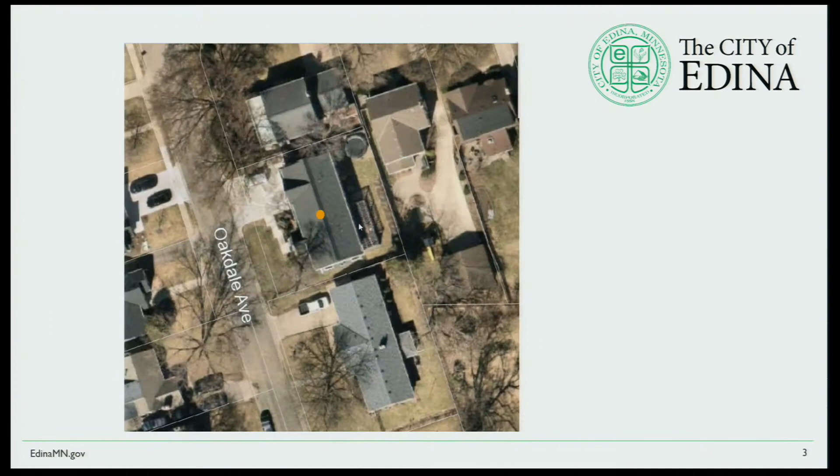Because of the depth of the lot, and given the minimum lot width in the R1 district is 75 feet, this lot is 80 feet in width by 120 feet in depth—wait, this lot is 80 feet in depth, so it's 40 feet short of the minimum depth requirement. When this house was originally built and designed, it fits pretty much as a rectangle, exactly within the required setbacks. The front yard setback is roughly 26 and a half to 27 feet, the minimum based on neighboring properties along Oakdale that front Oakdale. The side yard setbacks are 10 feet.

The house is built up to the 10-foot setbacks, and then the rear yard setback is 25 feet. So the back wall of the house does go right up against that 25-foot rear yard setback. Decks can be 5 feet from the side and rear lot lines, so the deck does meet the setback requirements.

The existing house itself is within the maximum allowable lot coverage requirements. However, with the deck area, there's quite a bit of deck area that pushes them up beyond the allowable 30% limit. They're at 31.5%, so they are over on the existing building coverage. They are under currently the 50% maximum impervious surface ordinance requirement.

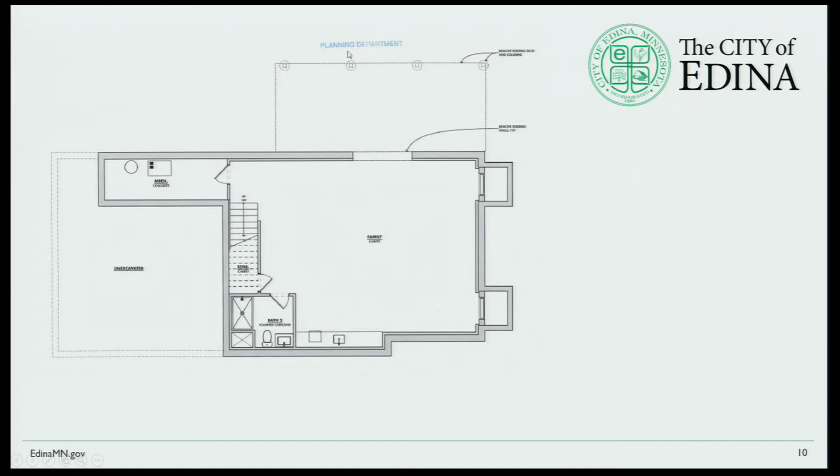So this is the existing basement area. With that deck, you can see the posts above on the main, and then what that will be replaced with is a bedroom or exercise room that will have an egress window on the south side. It's smaller than the deck.

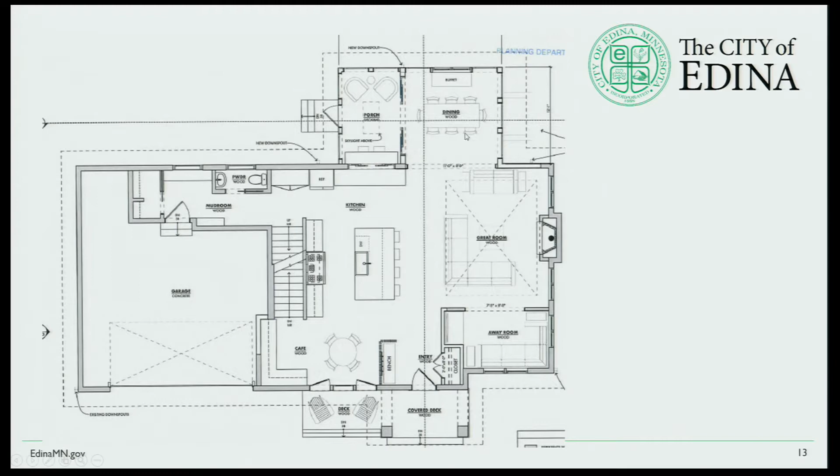And then this is the existing main floor with the deck, larger, and that addition that will replace it. And then on the second floor, it's going to have a flat roof. So that's what the visual will be from the rear yard, and then from the south. And then some perspectives of what's existing there currently and what they're proposing.

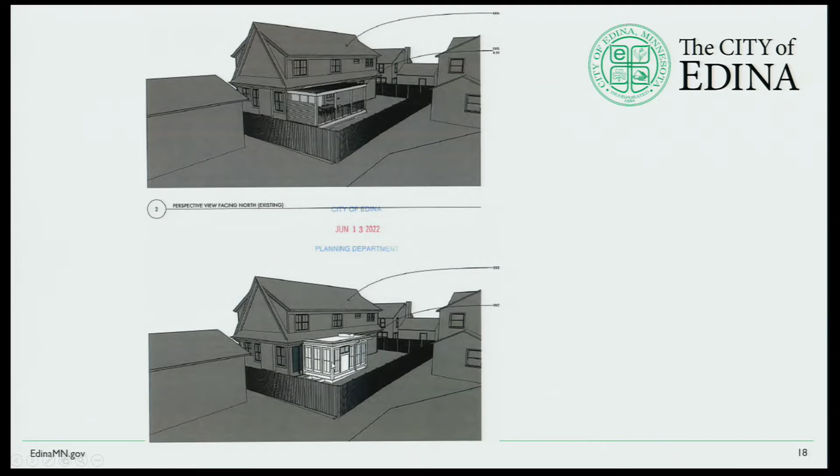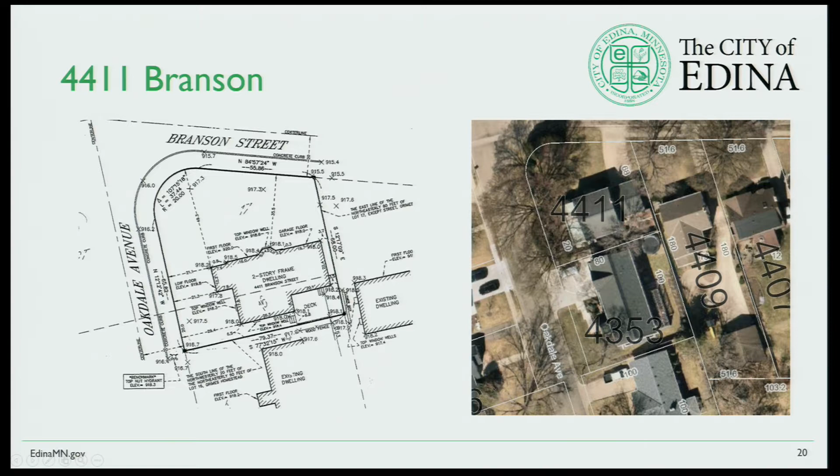This one, unfortunately, is on a corner lot, so they have deeper setbacks along the corner. Their rear yard setback is at 6.5 feet, side yard setback's at 3.5 feet, and their deck is probably within inches of the rear yard. And then the house directly to the south has, I believe it might be a porch at 4361 Oakdale that has a 13-foot rear yard setback.

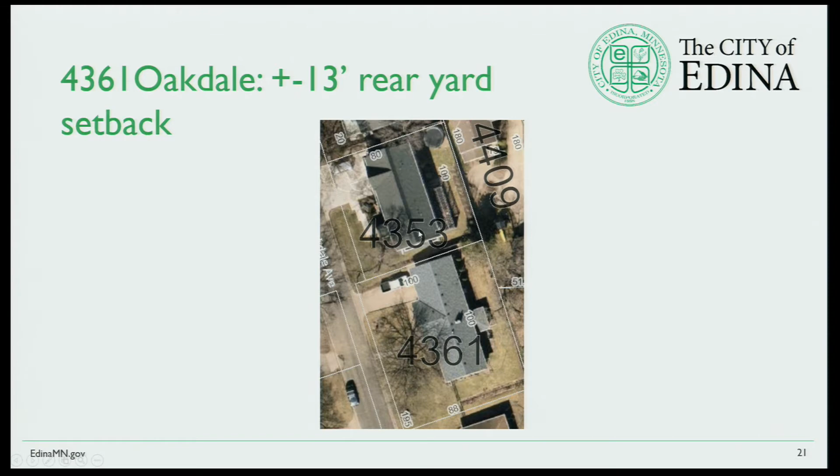So in terms of the adjacent homes that are along Oakdale, the setback that's being proposed or that they will be maintaining is not dissimilar to what is occurring. So rear yard setback variances are not ones that we typically see because there's usually the most opportunity to add onto your house behind your house in the rear yard. The only instances it seems like we run into an issue with that is when you have these shallow lots.

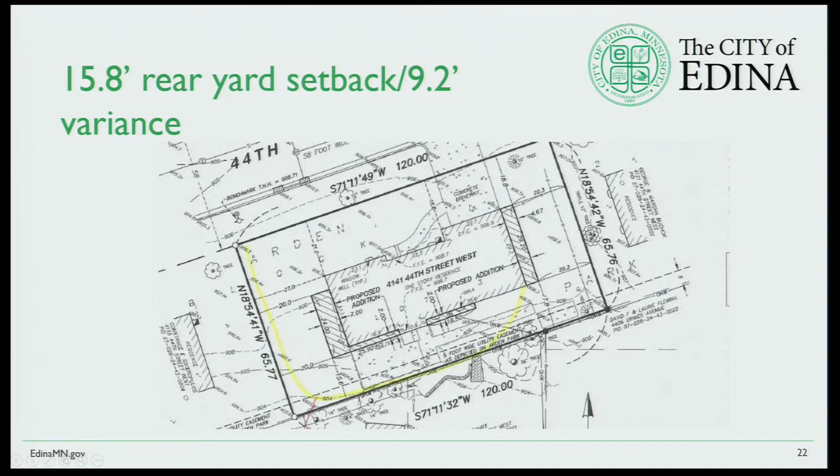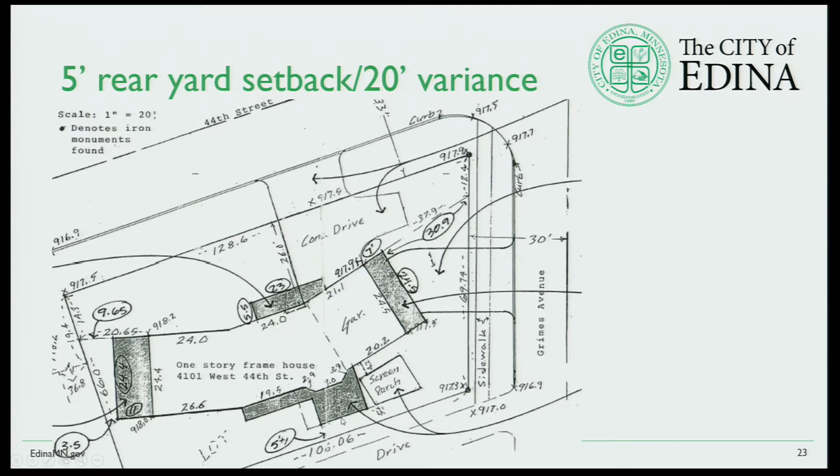Here's an example of one that received a variance for a 15.8-foot rear yard with a setback variance of 9.2 feet. You can see it's a very shallow lot. It's wide, but very shallow. And another similar situation where it was actually ended up being a 5-foot setback, so there was a 20-foot variance approved for that particular property.

So the primary issue is: is it a reasonable use? The proposed use is permitted in the R1 single dwelling unit district. It complies with the zoning standards with the exception of that east rear yard setback requirement. The addition will replace the deck that will improve on the building coverage. Currently, without the deck, the house is lower than the maximum amount of coverage, but they are constrained on all sides. There's no opportunity to add on to the house without the benefit of a variance.

The shallow lot depth and limited design opportunities was not a self-created situation by the applicant. This house, as my understanding, was not built specifically for them. But again, there's no opportunity without the benefit of a variance to modify.

The proposed addition conforms to all other zoning standards, and granting the variance will not necessarily alter the essential character of the neighborhood. All other aspects of the home conform to the ordinance requirements. The adjacent homes have some similar challenges along Oakdale with those very square, shallow lots. And the addition is not visible from the street, so the streetscape isn't going to change. So staff does support the request and does recommend approval.

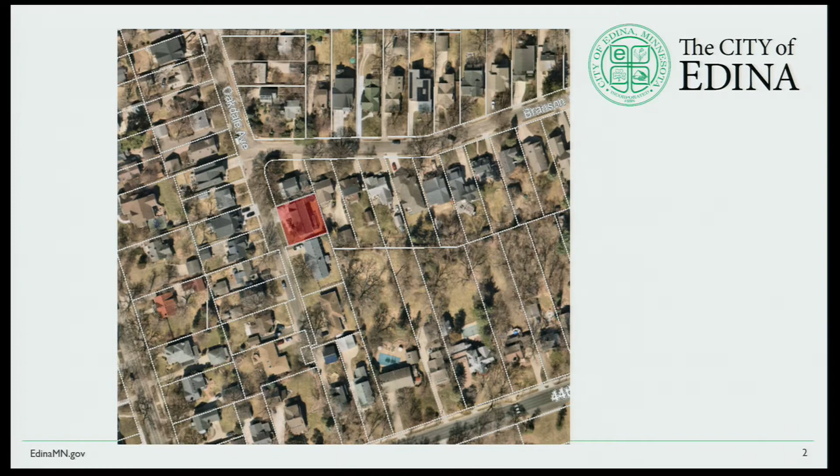If we do not approve this today, would that deck that's currently existing just stay there? Do you have any plans of removing it, or is it just going to remain as a structure? It would remain.

Okay, thank you. Any other questions for either city staff or the architect?

All right, then I think we should go to our public hearing. So we will now hear from residents who would like to provide testimony.

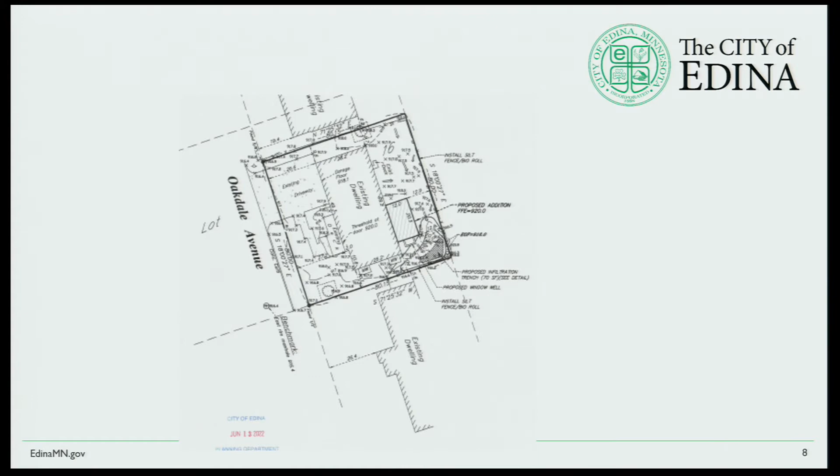Thank you. Any other questions? Commissioner Bennett? Just a clarification maybe for Ross, who's on the line too. As far as I understand it, we do treat decks and patios as impervious, even though water might seep through it. I mean, depending on the design, you often don't want to allow some permeability below your deck. And a lot of times there's things in place to shed water quicker underneath it for that reason. So maybe Ross could just comment on that too, if that is correct, that we objectively look at a deck as an impervious surface.

Just from an engineering standpoint, Commissioner Bennett, for the city. Yeah, I think I'd want to phone a friend and see if Chris knows the language better than I do, but I think you're correct that decks are considered impervious. I know patios are. That is correct. So I guess just to go along with that comment, yes, water can get through, but if they're designed well, they're almost like a roof that leaks a little bit. So, I mean, yes, there's a marginal change, but there really isn't that much of a change in hardcover when it comes to what's being proposed and what exists today. Even though it feels a lot different, it just isn't.

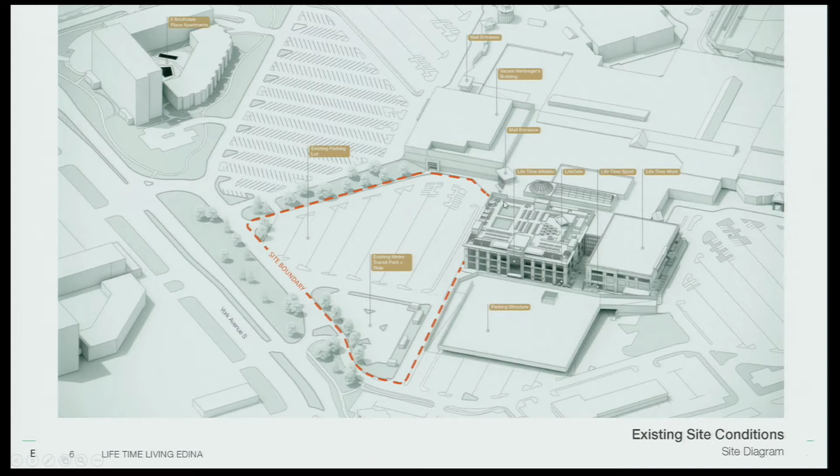Before you is a sketch plan proposal located at Southdale for Life Time Living. Within the Southdale site, the project would be located in the existing parking field north of the Southdale Place Apartments, and just east of the recently built Lifetime Fitness facility. The site is guided in our comprehensive plan for community activity center use, and is highlighted as one of the areas more conducive to dense development, particularly between France and York.

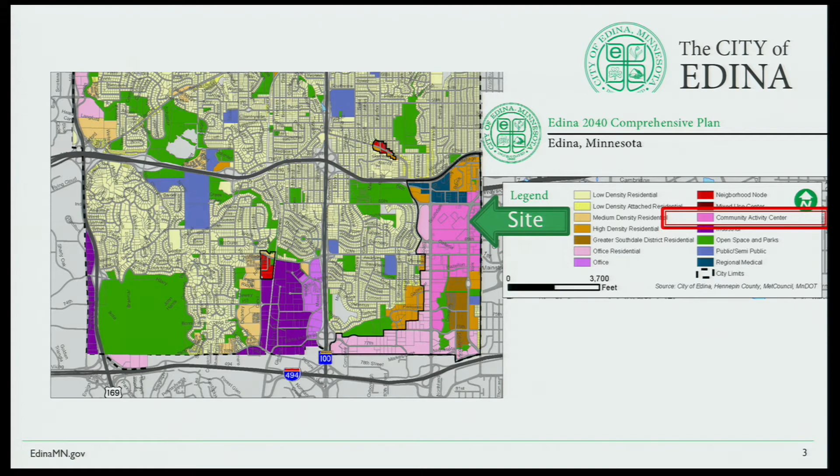The density allowed on this site would be up to 150 units an acre. The site is currently zoned planned commercial district, which allows office uses, retail uses, and apartments as a conditionally permitted use. The applicant is proposing to construct a 300-unit, 32-story, 400-foot tall luxury apartment building, located on a 3-story podium, connected by a skyway into the existing Lifetime Fitness.

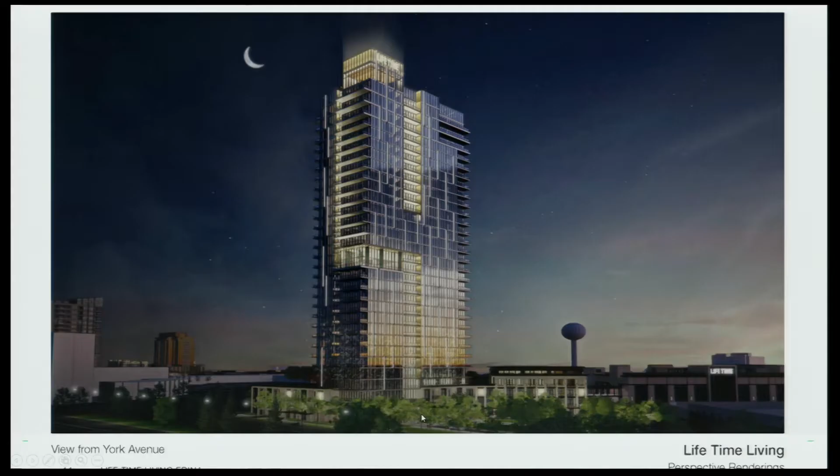Here is a rendering of what the project would look like at night. Again, you can see the podium, and the applicant will go through in more detail the specifics of the building and the site plan, so I'll just give you the high points here and what's required by code.

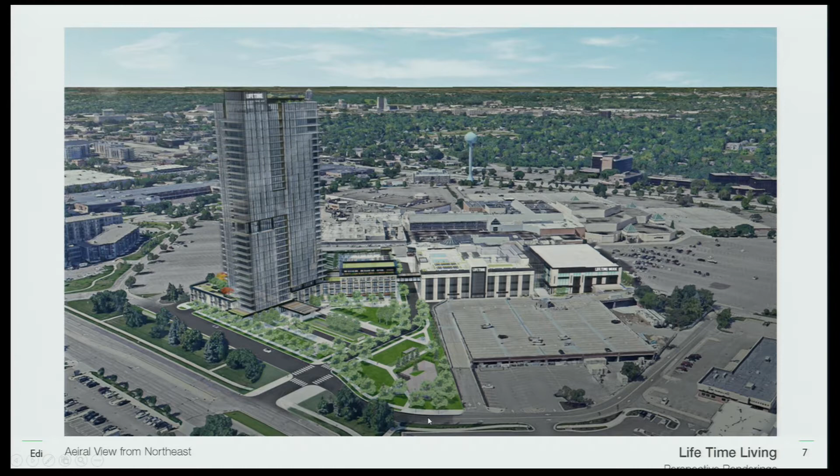Here's an aerial shot of the site. The proposal would include some significant green space addition. On the site that exists today is the Metro Transit station located here. This project would require that to be relocated on the site, so there's pedestrian connections and green space that would all be open to the public, with public easements established over that green space.

So what this request requires, should a formal application be made, is a site plan approval, a building height variance - currently the zoning ordinance requires a maximum of 12 stories and 144 feet - a building setback variance to R1 property, which I'll show a graphic demonstrating in a minute, and a parking stall variance. The residential development would be code compliant, but in terms of Southdale itself, they're taking away parking spaces, so they would need a variance for the overall Southdale development.

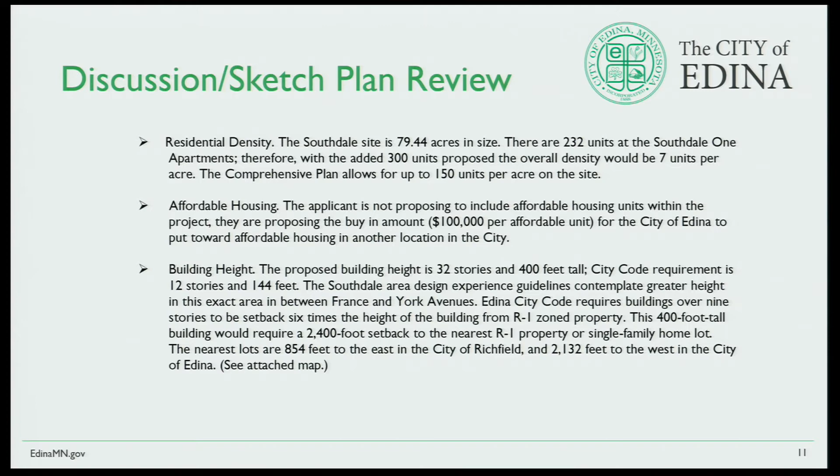In regard to the setback that I mentioned to R1 properties, for any building that's over 9 stories tall, the required setback to R1 property needs to be 6 times the height of the building. So the building itself needs a 2,400-foot setback to the nearest R1 property.

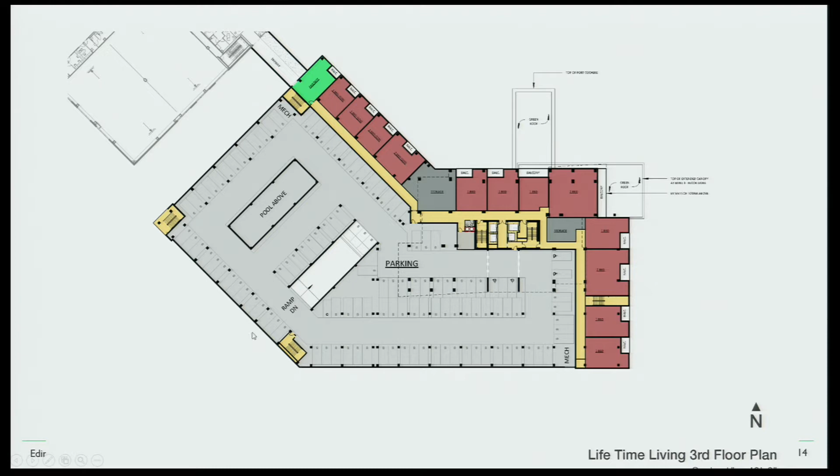But this was a concern raised in Mick Johnson's memo provided to the Planning Commission: the street typologies of the internal ring road that comes around through here, or at least the existing drive access. So this would be the parking ramp exposed on those sides, of course screened.

This demonstrates the tower, the location. As you can see, it is set on a podium that does step in from York and from the south. Part of Mick's review, he did talk about the 200 by 200 foot blocks that we're trying to achieve in the Southdale district.

He had suggested that the site be broken up into 3 smaller blocks with 3 apartments, essentially 3 buildings on the site. Again, the design experience guidelines are recommendations.

It's not code. It's just intended to get this discussion going as part of the sketch plan. The pedestrian connections - compared to previous projects at Southdale, where we've been developing the corners with Southdale 1, the RH on this corner, the Shake Shack on the corner, and the apartments, we've been really trying to get better pedestrian connections from the mall itself outward.

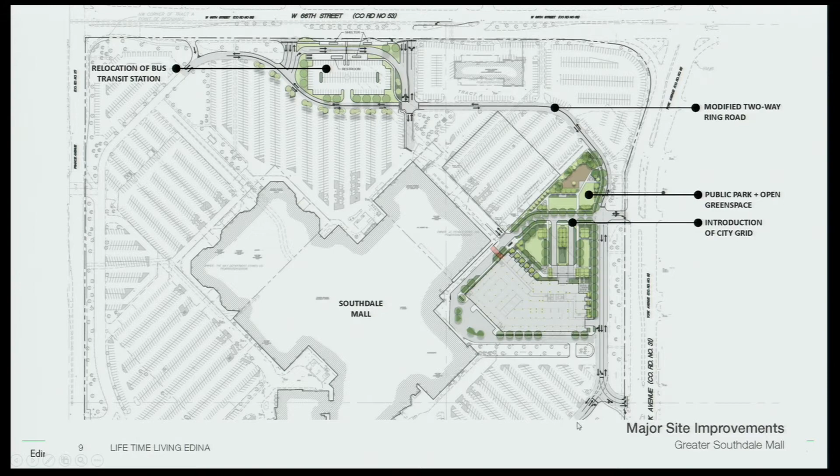This project really does that much better than those previous projects. As you can see, all of the green space that's added with those pedestrian connections out to the perimeter sidewalk of Southdale - there's quite a vast improvement there.

In terms of sustainability, with any formal application, they would need to address the city's sustainability policy. As I mentioned, the traffic and parking study would be needed with any formal request also. Again, the Metro Transit location, we'd need more clarification on that with the formal application. And I mentioned the variances that would be required as part of any formal submittal, and they all really center around the height of the building.

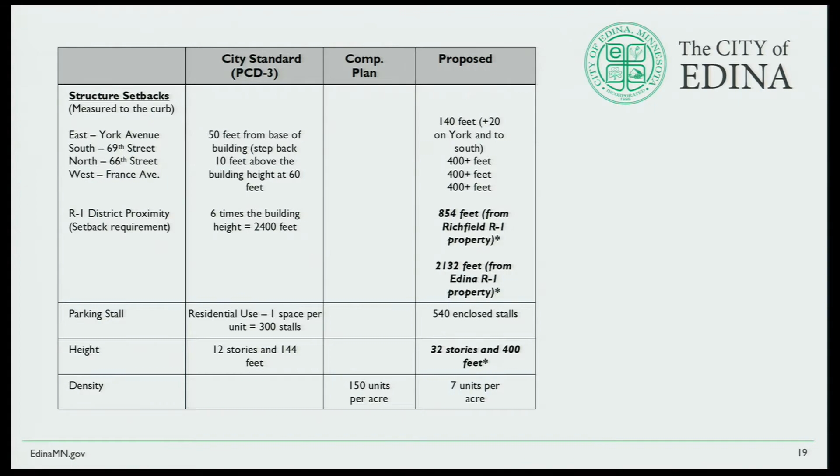So with that, I can stand and answer any questions you may have, and the development team is here to make a presentation as well. Thank you so much. What questions do we have for Director Teague?

Go ahead. Cary, perhaps for the rest of the committee too, or commission - what is the height of the Weston compared to this project? I don't know the exact height, but the Weston is 18 stories. So what would that be? 14 stories less. And is that, if not the tallest building, one of the two tallest buildings? You recall the 70th and France project that was recently approved? That will be 24 stories. So that would be the tallest. 24. Yep. Okay, thank you.

I have a question about whether Richfield has similar requirements related to height and the proximity to R1, and would any variance be required, or what does that partnership look like for something like this?

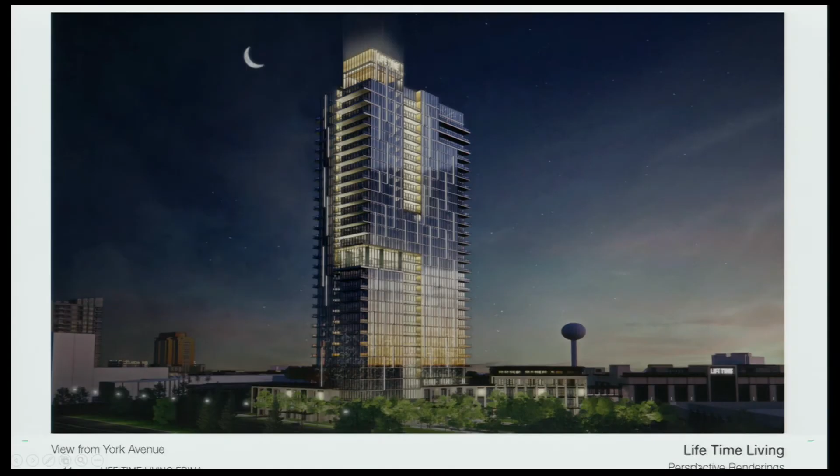I have not seen that type of ordinance in other cities. Not saying it's not out there, but I don't believe Richfield has something like that. There was a project that went through a number of years ago - let's see if I have a graphic. Well, it's this purple area, it's the Onyx, that's 4 to 5, maybe 5 stories.

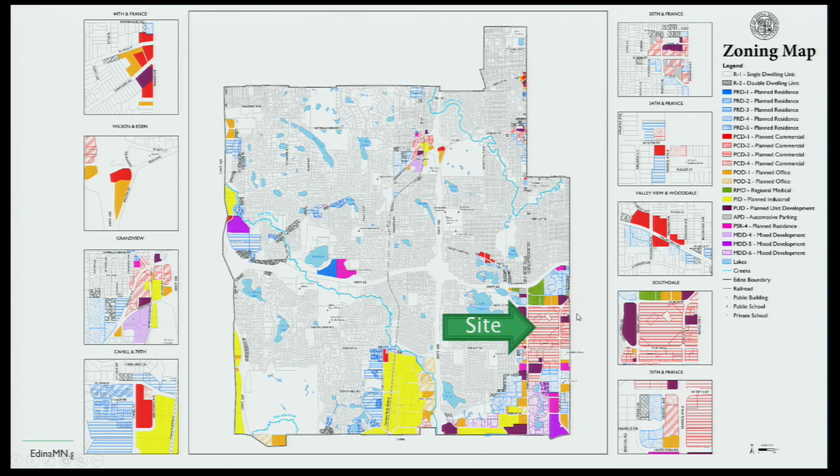There was a lot of concern with the city of Richfield with that project, and at that time staff drove around and took pictures of existing Richfield projects and their proximity to R1 districts. There is a building, an apartment building that was somewhat recently built at 66th and Lyndale - an apartment complex that's quite tall. I don't know the exact number of stories, but it's right across the street from single-family homes. We can certainly provide that information as part of any formal application to get more clarity on it.

I just wasn't sure if there was any official partnership or sign-off that we had to do with the city of Richfield, but it doesn't sound like there is. Correct. I have received some feedback from Richfield residents, so there is some concern over the height.

Thank you. Other questions for Director Teague before we hand it over to our other presenters? Go ahead.

For the public easement for green space - it seems like this, we don't really create new streets anymore and new public spaces. It's this sort of hybrid public-private thing. So is that something that the developer or the owner of the property still has control over?

Well, I would view this as similar to some of our recent projects, 70th and France as an example, that public park that's within that project. There would be an easement in favor of the public using that space, but they would still maintain ownership. Okay, thank you.

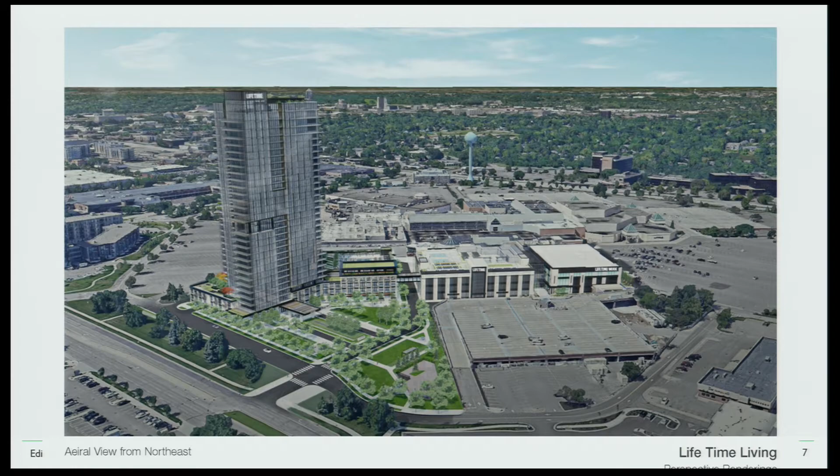Quick question, is this Southdale retail that's there, is it anticipated that that will stay? At this time, that's my understanding, yes, it would stay.

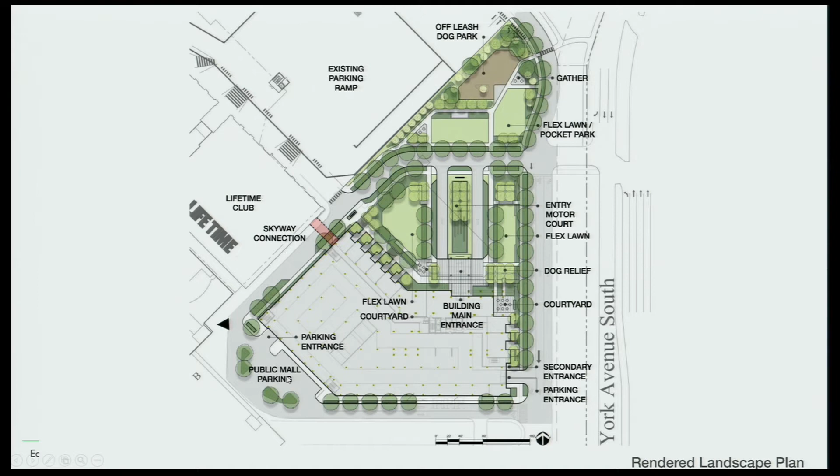Any last questions for Director Teague? Commissioner Smith: with the parking that's right outside the building, is that temporary parking, or is it permanent? Could residents stay there indefinitely, or is it just for temporary dropping off and picking up? Are you referring to this area right here? Yes, I think that's the only space. I haven't had any discussions in detail about how that would be used, or if there would be some hours restriction. That might be a good question for the applicant, how they're anticipating using that space.

It kind of gives the impression that those would be spaces designated for mall use. But we'd want clarity on that as part of any formal application, certainly.

Commissioner Bennett: although it likely won't impact this project, understanding that residential use is a conditionally permitted one for this type of zoning, where we're really hoping to capitalize on much more intensity, are there other uses that would be conditionally permitted, or just granted as part of being in this zoning? Like if they were to match some sort of retail component on part of the main level, or some other thing, does that comply? Are there other things that would be helpful to understand, that would need to be granted as part of this if it were to tweak a little bit?

That's a good question. If they were to add retail here, that would simply be a permitted use. It would change the parking calculation, so that would be the main thing to consider—would there be enough parking, and how that factors into whatever the parking variance is. But commercial and office are all uses that are simply permitted in this district.

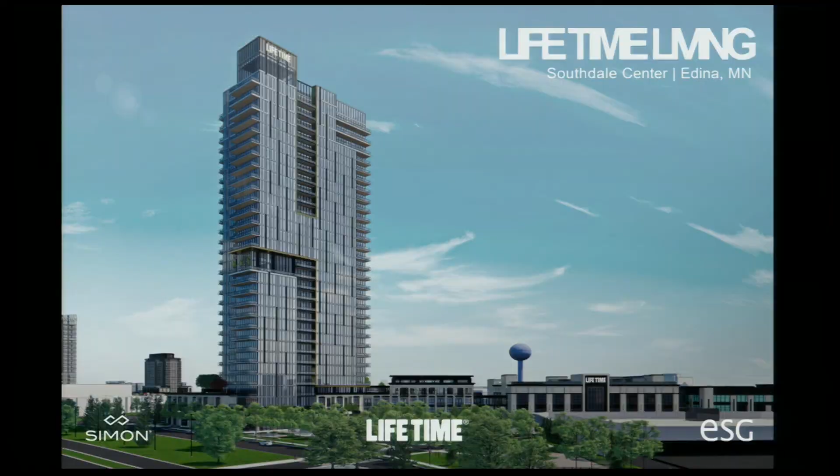So let me give you a little color into how we got there. The first question is, what is Lifetime Living? Lifetime has developed this concept—we now have a location open in Miami, and we're about ready to open one in Las Vegas in the next couple of weeks. It's really a concept about designing for healthy living. Everything we talk about in our designs, and even our operation model, is a curated living experience for our residents, and it's all about health and wellness.

But health and wellness is not just about working out. It's about the community, the social connections. It's having all the barriers removed from your life that give you back time—like traffic, et cetera—to focus on your health. So to be clear, all of our residents in a Lifetime Living project automatically include a membership into Lifetime, and that's Lifetime across the nation.

So when we talk about the connections we make with the Lifetime Club, it's not just the physical connections, it's also the social connections. We focus on concierge. In fact, our team in our clubs right now, they're actually concierge staff, not salespeople. We extend that into the Lifetime Living platform to make it really feel like a hospitality resort type feeling, and really about the community.

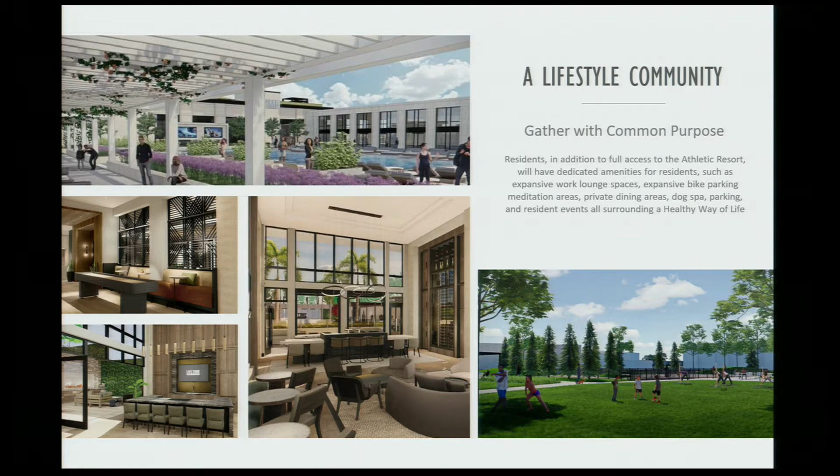They get access to the athletic resort, but we also have dedicated amenities in the building that serve the residents, so they have that private environment in their home, such as bike parking, meditation areas, private dining areas, dog spa, and parking for the residents. Everything is really focused on creating that healthy way of life.

But it's also a retreat. So when we talk about hospitality, we want you to feel like when you come home to your home in a Lifetime Living project, it's the highest quality of fit and finish. It feels like a condo, but it is for rent. It's really all focused around the details of how do you create healthy living.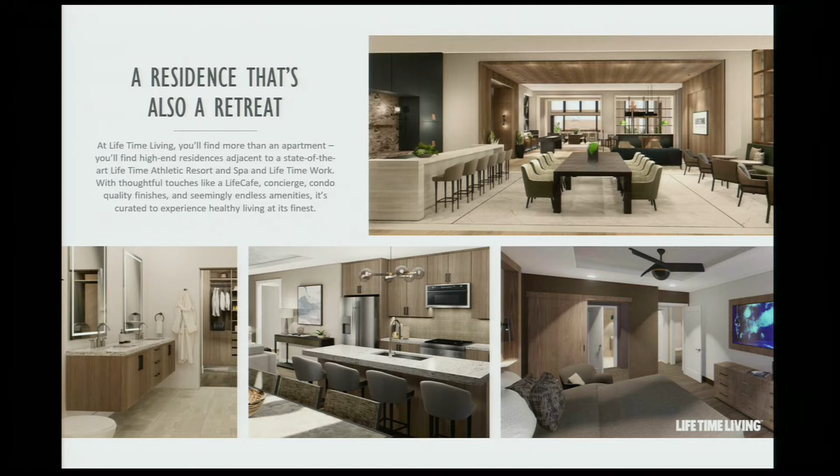So details like we do all wood plank flooring because there's less allergens than carpet. We have larger kitchen islands for healthy food prep. Everything is really focused around health and wellness.

So when we got into the design process, we wanted to focus on a lot of items. I talked a little about the stakeholders. There's a lot about the Southdale design guidelines that we've been considering as our guide for how we wanted to redevelop the site.

There's items about how do we get the health and wellness outside of the building? How do we make those pedestrian connections? How do we give access to bikes? How do we create green space that we can activate in the shopping mall parking lot that really becomes an amenity for all of us?

So we've been really focused on all of that, and really the end game for us is Lifetime is a place for everyone. Everyone who wants to focus on their health and wellness journey, we want them to do that with us. So this is the site.

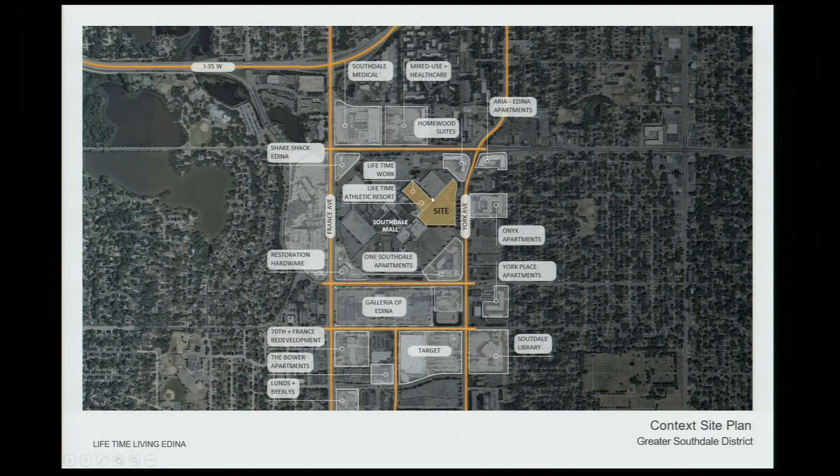As you can see, the Life Time Work and Life Time Athletic Resort buildings are located here. The site we're really focused on is located here. So when we first started focusing on how do we site the building, we really focused on connections - connections to the athletic resort, connections to the street network, connections to the pedestrian network.

One of the challenges with Southdale has always been the ring road system and the confusion between the one-way and two-way and how it starts and stops. So the yellow highlighted areas here show our proposed way to recreate this into a two-way ring road system throughout that area.

Secondly, we focused on the Southdale Design Guidelines, the guiding principle of this 200-foot by 200-foot grid network. To create that grid network on a site with existing buildings, existing tenants with long-term leases in the mall, it's really hard to scrape the canvas clean and start over. So we focus really on how do we introduce the grid network into this with the existing access points.

One of the key elements we focused on here was how do we get this access to become that grid network. We've also focused on, and our design team will talk through some of the other things, pedestrian connections, and creating that grid, not only just vehicular traffic, but also pedestrian connections through here.

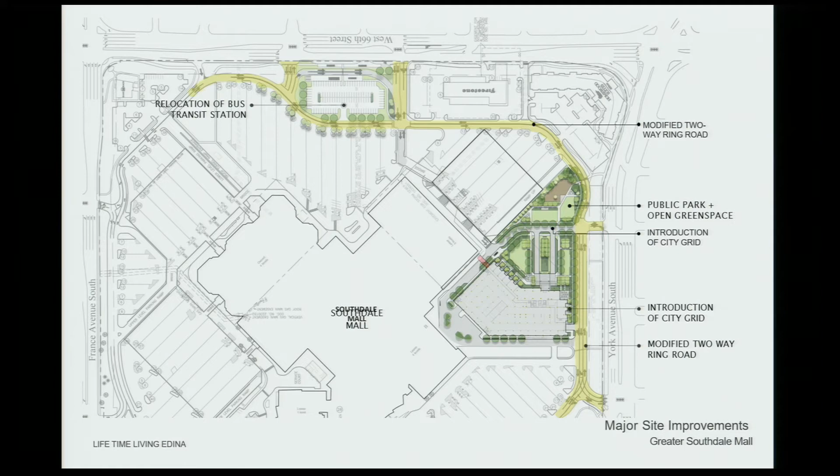So we'll get into the site itself. This is the localized site we're talking about, outside of some modifications to the ring road and the transit relocation. As you can see, it's a heavily hardscaped surface parking lot, actually depressed down into the mall property. As you get closer to the mall property, it hits that floodplain level, so there are some complications or considerations with the site there.

And it's facing this inner part of the mall that is the side yard to two major box retailers. So when we started planning for this, at one point we were looking at how we could make this building as efficient as possible. Could we just do a simple box, and what would that look like on the site?

We oriented it a couple different ways and then really felt it was the right thing to do to try to find a better way to shape the building so it would nest into that existing built structure and not take up any more of this triangular site area than it needed to, providing more front yard to the building, if you will.

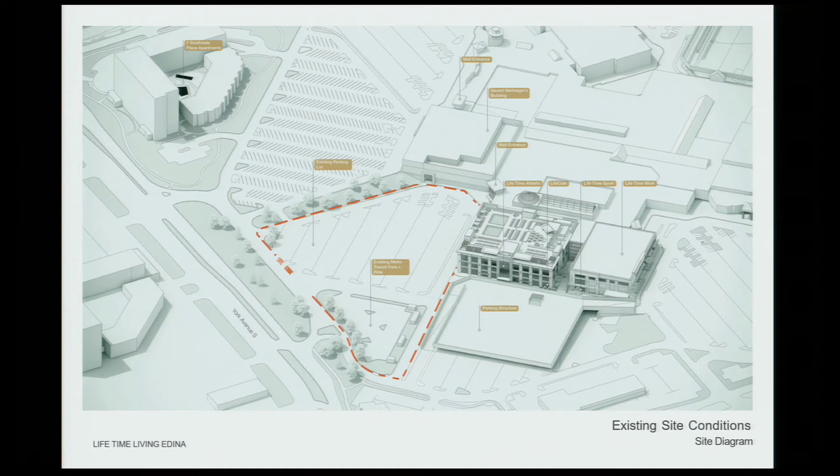So as we fast forward to our site plan, that's how you can see the shape of the building. You see it's got a cant to it. It's nested into those big box retailers adjacent to it. It maintains the service drives that exist today along the mall property and along the side yard of the Lifetime Club.

Those are some of the things Carrie's given you as food for thought. We can talk about what that experience looks and feels like. But again, pulling that building in allowed us to have this network of greenscape, and it also allowed us to make a better connection to that York entrance.

The comp plan and design guidelines talk a lot about this 200 by 200 grid, and I'll give you an idea of what this looks like. Our sites, these parcels, are bigger than 200 by 200, but what they do a little better than the example in the AUAR report is allow for more usable area. It doesn't compartmentalize these triangular sites into tiny little pockets that wouldn't be very developable or usable by the community.

I think the emphasis on having a lot of greenscape in the front of this building is with the city and the neighboring communities in mind. They are offering a number of amenities here. We're talking about options for landscaping. Right now, we're looking at doing all the stormwater management in tanks below grade, but that doesn't mean there wouldn't be strategies for bioswales or other sustainability initiatives. The permeability of this site is increased vastly by what we're doing here.

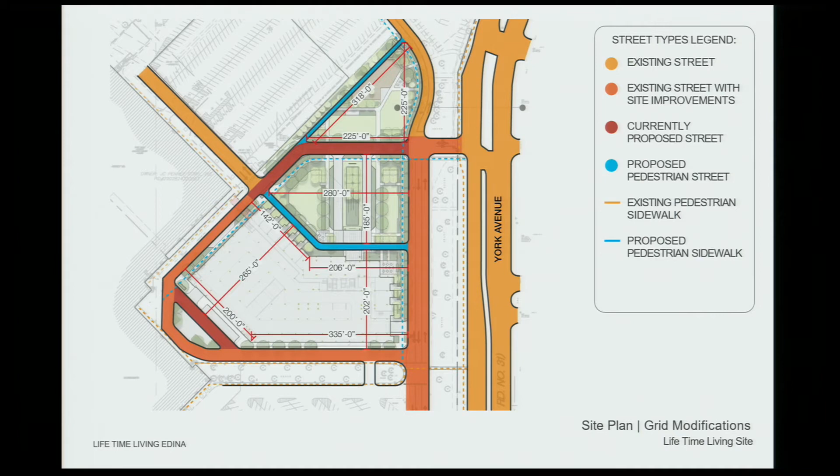Let me get into the site. As Eric mentioned, it was on the forefront of our mind — this site is nested right in the center of Southdale, north-south. We're very aware there are city goals and objectives to keep that connection happening from the north side to the south side, providing permeability to all the residents living just east of this property. This is an example of the modifications being made, or the introduction of roadways, focused on how vehicles might traverse the site — the infrastructure, if you will.

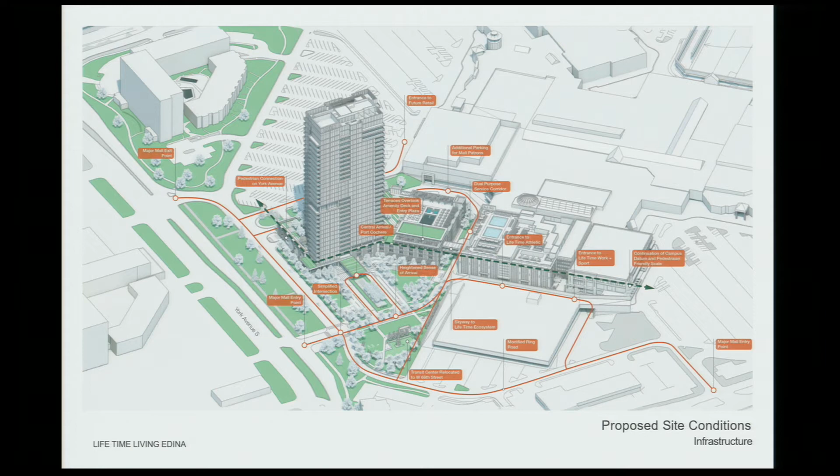Taking that one step further, we've layered in a whole hybrid network of pedestrian connections. Here you can start to see connections back to One Southdale, connecting up York to the north side of the site, and maintaining all the access points for residents coming from the east into the mall, into their Lifetime Club, into the upper level. There's a bit of a grade change — our building becomes a whole level lower down here than the big box retailer up here, so should that become a grocer or something else, there are still means for residents to maintain their connections.

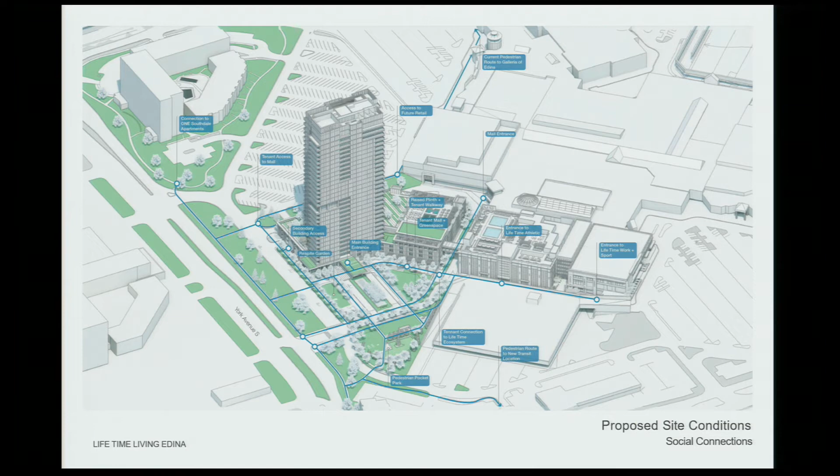Getting a little into the design and orientation of the building — it was really important to us to create a continuum. The Lifetime work is connected to the Lifetime Fitness Center, and we looked for ways of mirroring the scale of these existing buildings with the podium and then into the tower, so you can see that facade continuation.

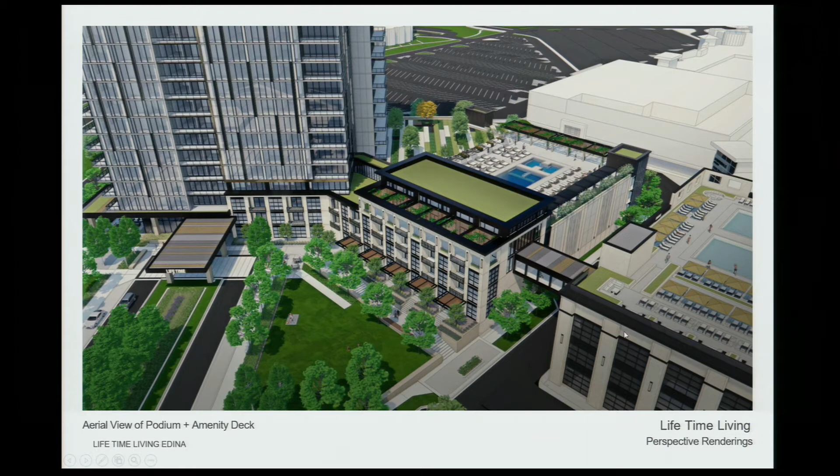As Carrie pointed out, you can see the vast amount of green space in front of this building. Looking a bit closer, you can see the replication of materials — trying to fit the podium into the fabric of the existing conditions, both in scale and in materials. Design guidelines very clearly call for quality materials at the base of the building.

Stone, brick, low maintenance materials — that's precisely what's proposed for the base of this building. Then the guidelines talk about going to more transparent materials above 60 feet — glass, metals — which is what we're proposing for the tower as well.

Scale-wise, looking at the built form guidelines, there's a requirement to step buildings back and address them separately once they hit that 60-foot height. Our podium right now is generally about 35 to 40 feet, with a bit on this corner where we start to replicate the scale of the club, still just under 60 feet — so the podium fits very nicely into those form requirements.

You can see emphasis on the attention to detail on the roof structures, with decorative ballast and possibly some green roof solutions — a lot of thought on sustainability and on the experience of looking down on these buildings from the high-rise tower.

Just to give you an experience of what it's like down at the pedestrian scale, connectivity is extremely important. The design guidelines also talk about de-emphasizing vehicular traffic. So we spent a lot of time thinking about how the pedestrian experience would work on this site and how they might be able to traverse it while still giving this building a regal front yard.

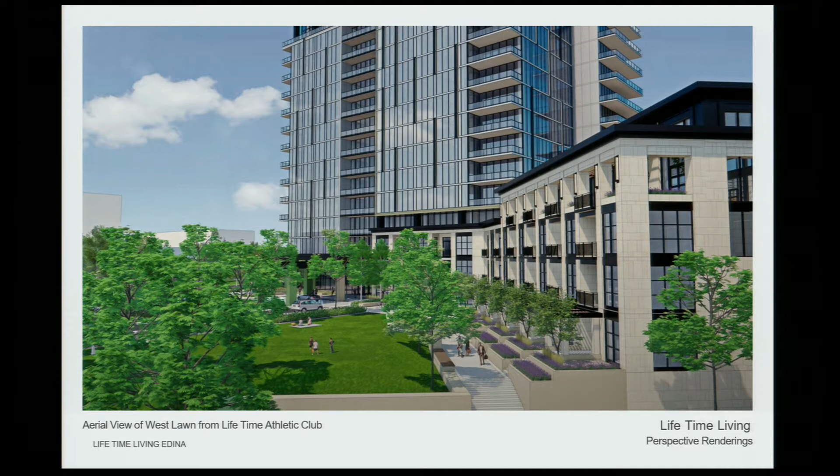So you can see the pedestrian street exhibited here. This is a perfect example of decent urban planning strategies where you're attempting to create transitions from what is public to what is private through a series of different changes—whether or not this is elevated, whether there's walls to it, whether it becomes more fluid. That's all going to be part of our design process.

But the idea is that there's a means for the public to connect straight through this site at the front door of this building, while also providing walk-up dwelling units with their own outdoor patios, porches, and terraces. So moving around the building, you can see the grand drop-off.

Again, we thought a lot about what we wanted to do with the base of the building. We've got a podium that wraps around. We did make the architectural move to erode that podium and bring the transparency of the tower down to the footprint. It makes for a really grand entrance. There's a porte-cochère covered drop-off, and I think there's an opportunity for some outdoor courtyard space—it just makes a good impression.

Looking at this site and thinking about vehicular traffic and how we have a drop-off, it's becoming more and more important in multifamily buildings to address people getting picked up and dropped off with rideshare. It's becoming more forefront of our minds as we develop these buildings.

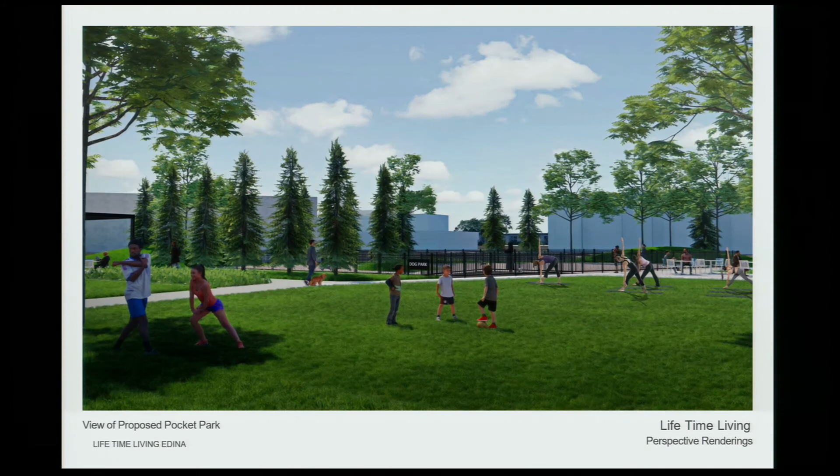The parkland, I mentioned, is a work in progress. I think we'll think a lot about what this wants to be as we start shaping up the plan. One of the goals is to create public space, a variety of public spaces. I think we're going to look at natural plantings and stormwater management solutions. We want it to be highly usable, an amenity for the entire community. We're also going to look at landscaping strategies to create a buffer that conceals that exposed parking structure that's there today.

Looking at the building form, this is a view of the building as it comes together. You can again see how the relationship between the tower and the podium is working. It was important to us not to have a simple flat glass facade on this building.

We're looking for opportunities to create movement in the facade. So you can see there are some recessed balconies, some balconies on the edges of the building, some plane changes. We've been talking a lot about glazing strategies, perhaps having two different types of glazing to really emphasize some of the ribbons around this building and recesses. There are some decorative architectural fins.

We'll get into the unit planning and how to make these residential dwelling units feel as appropriate on the inside as they are beautiful from the outside. I think that'll be the balancing act between metal panel and glass, but those are some of the things we're starting to look at.

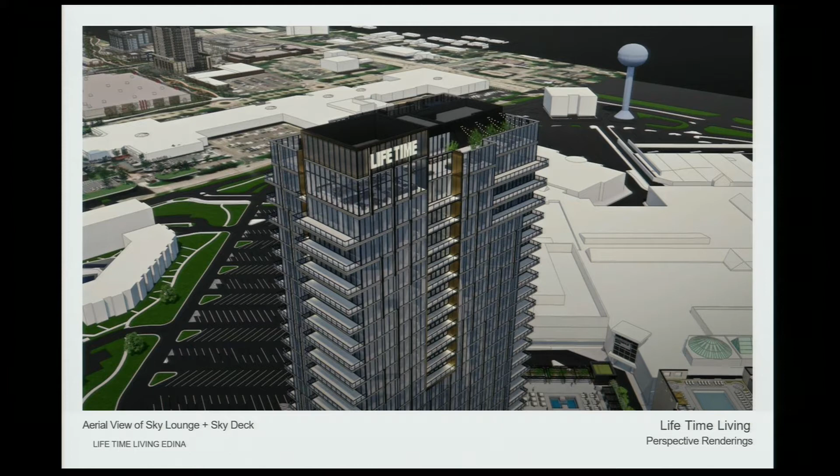And then finally, looking at the top of the building, we're proposing a 2-story volume sky lounge with a cap to the building, really just looking for a great way to terminate the top of this really monumental tower with an outdoor terrace as well. So again, taking advantage of the fact that we're creating this taller building for a luxury client with the views of the city.

And with that, I'm here for questions. And to Eric's point, we really want your feedback. We want to know what's important to you. Thank you. Thank you so much.

So I will ask the commission to start with questions, and then we will definitely get into all of the wonderful comments I'm sure they have. But we will get kicked off with Commissioner Alkire.

Thanks for the presentation. It's an amazing looking building. I guess the first question that I have for you is, are you planning anything, or would you consider anything that would have, on the first floor principally, that would be a public resource that would draw people who are not residents or not members of Lifetime Work or Lifetime Fitness to that destination?

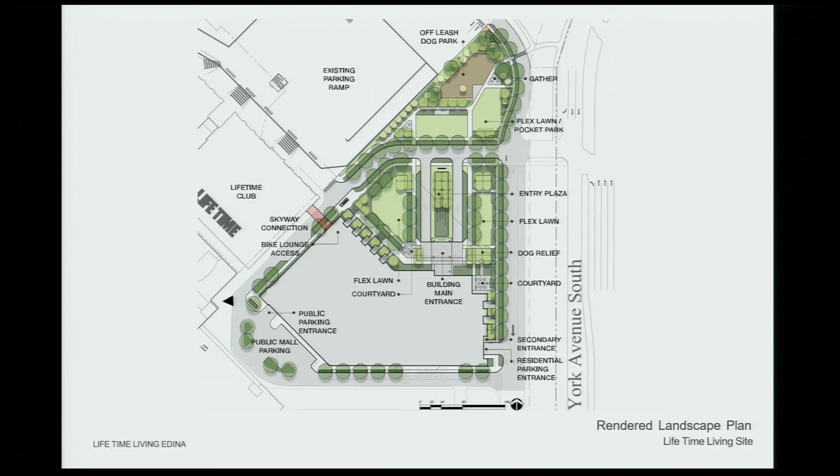But I agree that I would rather start somewhere doing what you're doing than not do anything and keep waiting for it to die out. And so I feel a sense of urgency, and I would err on the side of supporting this project, even if it weren't perfect in my eyes, because it's starting to challenge a lot of the ways we think about centers and that core part of Edina.

And hopefully, I mean, if this gets built, it will certainly serve as a catalyst to other development just for height, and Simon Properties getting more creative with other developers and partners such as yourselves.

Just looking toward the district plan, there's a bunch of aspirations it has, and I feel like if you go through those one by one, you guys are really hitting on a lot of them to the core. I would say the main thing missing, and what's been kind of the theme amongst us all, is the inclusivity. I think in Edina, the reality is people want some exclusivity. That's just what's in our city, and I think that's totally supported in the project.

32 stories in the air. So if you're not integrating it vertically, I would expect some sort of creative implementations on that main level of where you're going to engage pedestrians and cyclists and other users of the mall that aren't excited to go to the mall right now. But this could be the gateway for reinvigorating things.